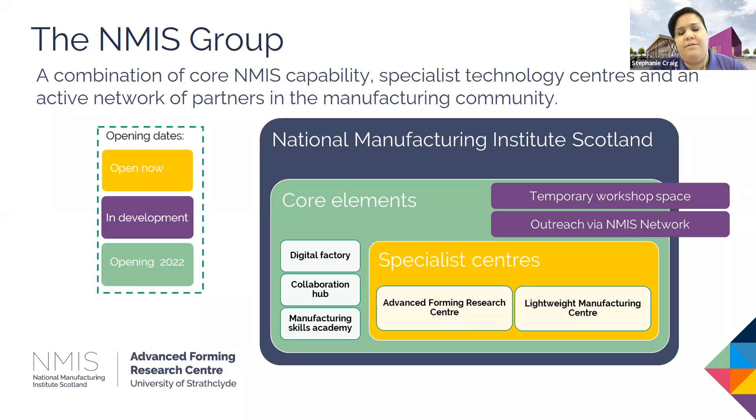So if we jump to the next slide, I will briefly explain the benefits, just a flavor of the benefits of modeling for the industry. First of all, the most important benefit is that modeling is going to explain the kinematics of the sheet metal forming process. SPF, hydroforming, all these forming processes are not easy to be understood.

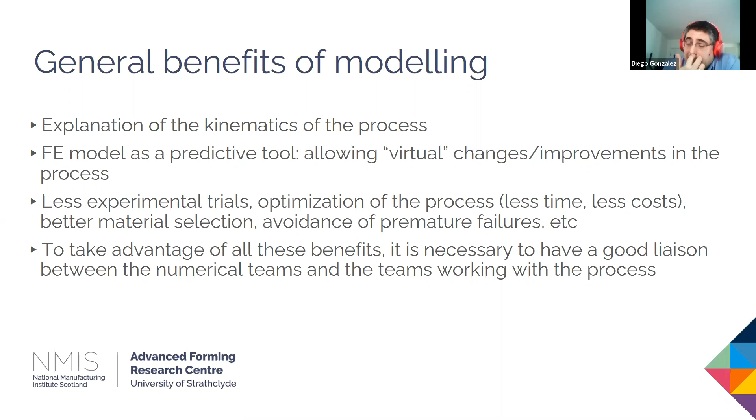In the next slide I will briefly explain the general capabilities we have in terms of modeling in the forming team. We work with two types of software. We have commercial software, and bespoke software focused on sheet metal forming applications like PAM-STAMP, for example. We also have general purpose software like Abaqus.

We have expertise in the implementation of Fortran subroutines, user element subroutines, or user material subroutines. On many occasions the commercial software needs to be complemented because you cannot find in the libraries the type of user element or material you need. So we have expertise in this type of Fortran subroutines, and we also have expertise in MATLAB and Python scripting.

In the image of the slide, we have a general workflow of a simulation of a sheet metal forming process. We can start with a MATLAB script, for example, in order to obtain the values of the parameters of the model. We can then jump into the FE analysis. We can have the commercial solver dealing with the equations of the problem.

And we can at the same time have coupled with the FE solver a user subroutine to define the material, for example. And then we can post-process the results by means of a Python script.

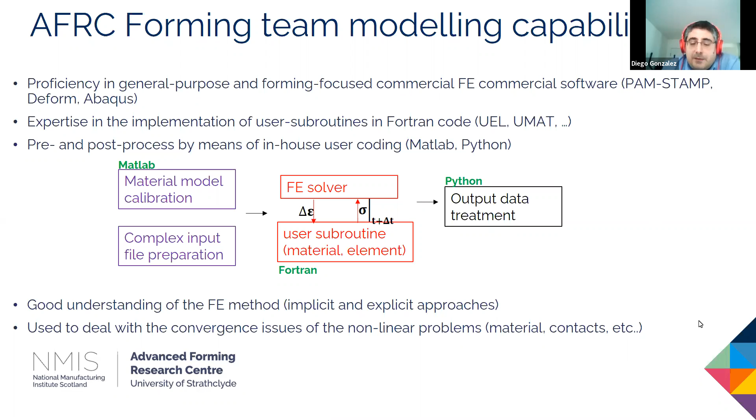If we jump to the next slide, we will explain briefly a bit of process modeling. In order to take advantage of the benefits I mentioned before - the kinematics, the understanding of the kinematics of the problem, the optimization of an industrial process - we need to have a reliable model. This means we need to consider all the relevant aspects and variables of the hot or cold forming process, whether it's SPF, superplastic forming, creep forming, deep drawing, or hydroforming.

We always need to consider the friction, the exact value of the friction of the process, the initial blank shape, and the material, which needs to be defined and characterized very precisely and accurately. All these relevant aspects need to be considered in the problem.

In the images of this slide, we have two examples of SPF simulation. On many occasions, the client asks the forming team to come up with an optimization of the SPF process, and we find the optimum pressure cycle in order to have optimum SPF conditions within the titanium material or the material of the SPF process.

Or in other cases, the client comes to the facility asking for a temperature reduction, with all the benefits linked to this reduction - less alpha case formation, cheaper tooling - and we need to find the pressure cycle to proceed with this reduction in temperature.

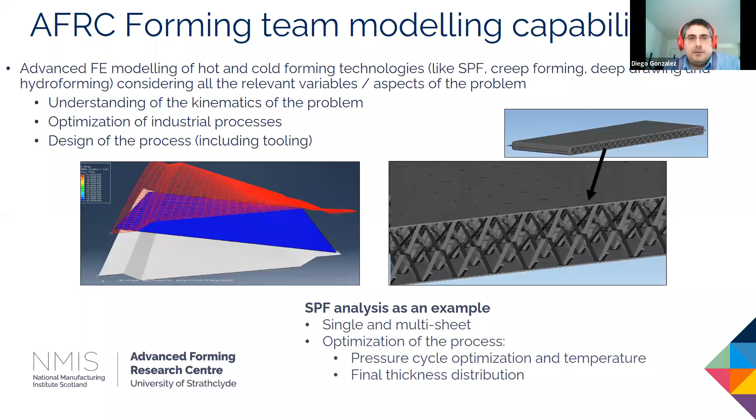The next slide will explain a little bit about the testing capabilities we have in the AFRC. Obviously, the type of tests we do are linked to, or are based on, the analysis needs.

If we work with cold technologies, we proceed with tensile testing, for example, to define the flow curves, the R values, the anisotropic values. This is also available for warm conditions. If we work with SPF or hot forming processes, we proceed with tensile testing at high temperature in order to capture the rate dependence of the material on temperature.

In terms of failure, we need to know the limits of the formability of the material. We have the bulge testing based on Nakajima test samples, and coupled with this test we have GOM equipment and a digital image correlation approach.

When we need to validate the material, the simulation, and the model, we can proceed with GOM scanning of the components and compare the thickness of the formed component against the results of the FE simulation, or we can compare the shape of the formed component with the FE results.

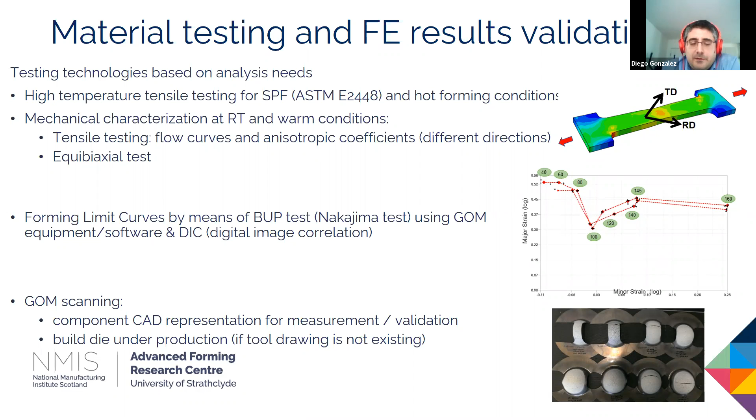In the next slide, we will briefly explain a bit of the material modeling. Obviously, material models are critical to have accurate and reliable simulations. We work with advanced plasticity models, rate dependent and rate independent models, and we have experience with anisotropic models.

We work with kinematic hardening models like Yoshida-Uemori to capture, for example, the spring back phenomenon. PAMSTAMP has this Yoshida-Uemori model built into their software, and it is really useful to precisely capture the spring back phenomenon. We also have expertise in microstructural-based modeling.

Hosan will talk about this later on. Here is just an example where we apply microstructural-based modeling to understand how the grain size evolves during an SPF process.

Calibration of these plasticity models is really important, and we do it through MATLAB scripting or by means of the math wizard in PAMSTAMP, for example.

We need accurate estimations of the model parameters. When we talk about damage prediction, we also have expertise in this type of model, which evolves a damage variable for each individual element of the simulation to determine when we are going to have fracture.

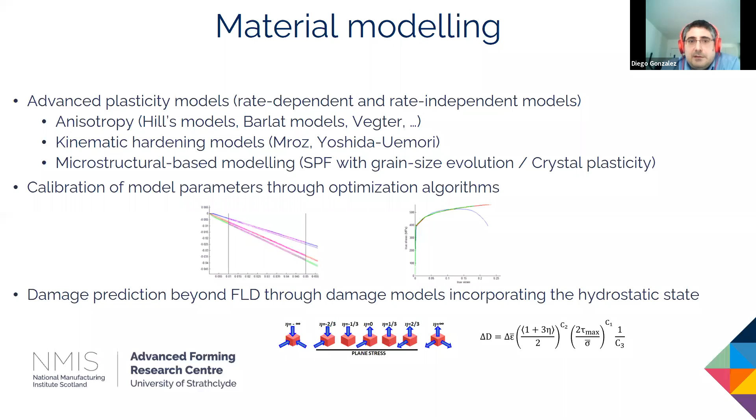In the last slide related to material modeling, I will briefly explain how we proceed with the anisotropic characterization. In cold forming simulation, we need to precisely capture the anisotropy of the material. In many occasions we have to deal with titaniums or aluminums, or materials which have a lot of anisotropy.

We have a very good understanding of anisotropic models - the Hill family of models, the Barlat family of models, Vegter, and other anisotropic plasticity models. To correctly define which type of plasticity model we need to apply for a specific material, we need to consider all the information available, all the information coming from the lab.

We consider the yield stresses at different directions within the blank. We consider the equibiaxial yield stress, which is very important because we want to capture and understand how the material behaves in an equibiaxial mode. When we form a component, we mainly have plane strain and biaxial deformation modes, more than pure tensile modes, and we also use the R values, the anisotropic coefficients, which allow us to understand what type of anisotropic model we should be applying.

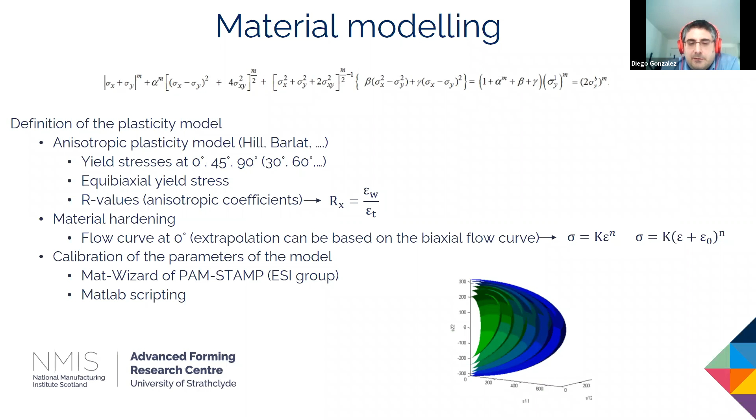We will jump now into the 4 case studies. So Hosam will explain right now the simulation of superplastic forming processes.

Thank you, Diego. Hello, everyone. Today I will take you through 2 case studies from our work in modeling of different processes. The first one will be about the modeling of the superplastic forming process.

Modeling the SPF process is required for many goals. One of those goals is, for example, the development of the pressure curve, as Diego mentioned, required to set the press to form the component.

The whole steps from developing this curve, starting from the moment the die arrives till we have the curve, was described in a previous webinar titled Superplastic Forming Benefit and Challenges in our NMIS Inside webinar series. Hopefully you have attended this webinar. If not, you have a chance to view it again through our YouTube channel.

One key step in the development of the curve is the finite element analysis and modeling the SPF process. To have an accurate FE result, the material should be well characterized to get the material parameters that will feed the material model used in the analysis.

As Diego mentioned, in the AFRC we have those materials testing and characterization capabilities to get those material parameters. We do high temperature tensile tests on our Zwick testing equipment. Tests can be done in argon environment and up to 1200 degrees Celsius.

We need the material properties from two types of tests, the step jump test and the normal hot tensile test, to have the flow curves at different controlled true strain rates at required temperature. As a result of the various tests we completed for different alloys, we have good expertise in testing different materials. Then once we characterize the material and based on the test result, we can define the optimal SPF conditions.

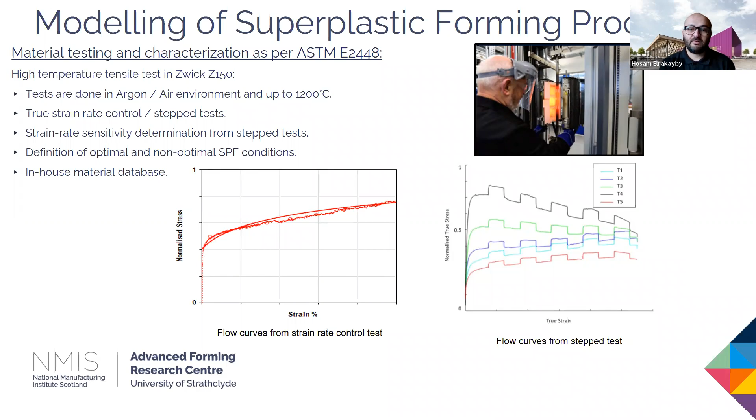As you see in the top right of the slides, there are phenomenological and microstructure rate-dependent material models that are well known and available in the public domain that we use beside other models to represent the material behavior. For example, the last constitutive equation captures the grain growth or the grain size evolution during the SPF process.

This equation captures both the static grain growth by atomic diffusion due to the high temperature in the absence of deformation condition, and the other part of the equation captures dynamic grain growth, which is related to the material deformation. While the mechanical behavior itself is modeled by the viscoplastic response of the material, which is expressed by a power law-based model, for example, as in the first equation.

Then two steps are usually carried out to calibrate the material model and to model the material response during SPF. Firstly, the microstructural evolution is numerically analyzed by calculating the parameters of the last equation, for example rho, phi, mu1, mu2. The fitting of the experimental data for the grain size is based on in-house developed MATLAB script.

Secondly, the flow curves are fitted by using the grain size evolution data as an input to the constitutive equation at the top. Once the model is calibrated, it is then implemented into the FE package through subroutines.

As a result, from the analysis, we can get the pressure curve, visualize the material deformability, thickness distribution over the forming component, thinning, and etc. That helps us to predict how the final component will look like and saves a lot of trial costs that would have been spent if we tried to form the material without modeling to understand its formability.

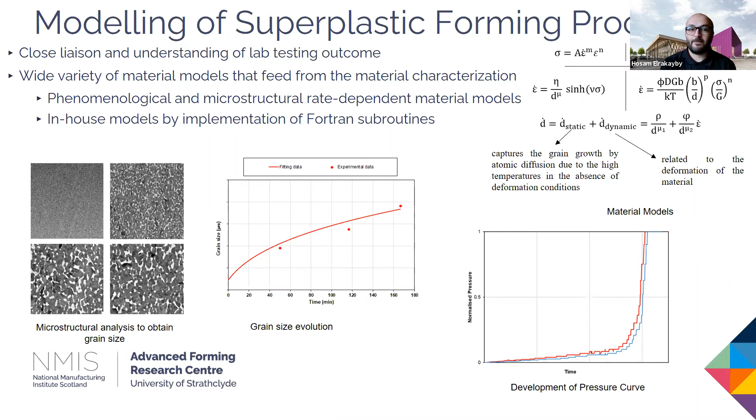So we have here Ti54M titanium alloy, developed by our tier 1 member, Timet. This alloy has almost the same mechanical properties as the well-known Ti64, but it can be deformed at lower temperatures. Therefore, there is a potential for Ti54M to replace Ti64 in an SPF application.

You can see in the figures the thickness distribution of a component after being formed. On the right side is the GOM scanning result of the formed component, while on the left side is the finite element calculation. There's a good agreement between the FE result and the GOM result. This is one outcome we have from the analysis.

We can also check the formability of the material at different stages during the process, and we can check the grain size of the component, etc. So, as I mentioned before, there's no need to spend money on trials to get results - through modeling, we can predict those results and save a lot of money.

That was all about the modeling of the superplastic forming process. And for now, I will pass it on to Elangovan.

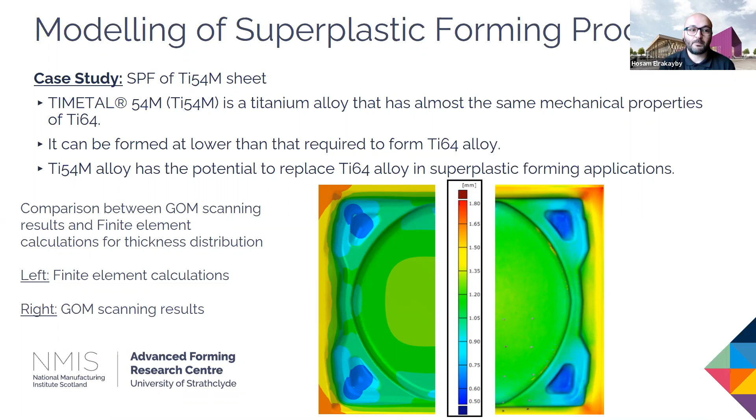Thanks, Hosam. Hello, everyone. I'm going to talk about cold sheet forming process in the next few slides. The case study is about the punch hydroforming of nickel superalloy. For the benefit of the audience, I just want to give a brief introduction about the process.

So what do you mean by hydroforming process? The hydroforming process is a specialized forming technique that uses fluid pressure, for example water or oil, to deform the sheet or tubular material to form a required shape.

Excuse me, yeah, sorry about that.

So the typical hydroforming techniques the industry uses for sheet forming would be the cavity type hydroforming process and then the punch based hydroforming process. Today I'm going to talk more about punch hydroforming.

So the typical materials the hydroforming process utilizes right now - we could form steel material, aluminum, commercial pure titanium, and nickel superalloys. These are the typical materials which we could use the hydroforming technology to form.

And the aerospace industries use this technology to form very complex geometry. However, there is very limited use of this particular process in the automotive industry, so they could take advantage of the benefits coming out of the hydroforming technique.

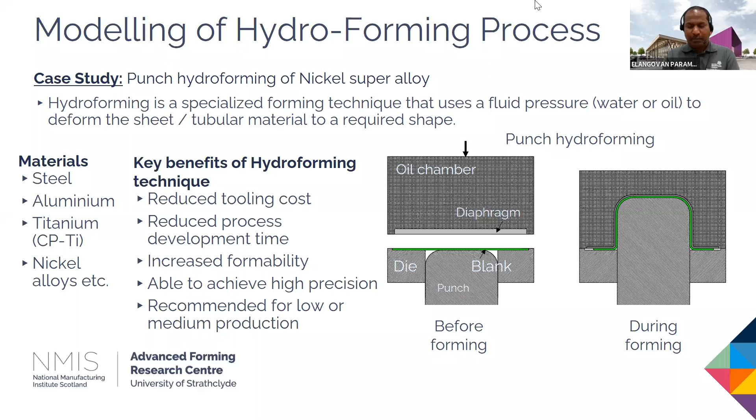And before we go for process modeling, we will try to analyze the material, as discussed in the previous section by Diego. So we do a lot of material characterization for the benefit of accurately predicting the result. We do tensile testing mainly to characterize the work hardening behavior of the material, and the anisotropic behavior of the material. And then we use the bulge test, mainly to capture the biaxial yield point, which is very critical to develop a material model.

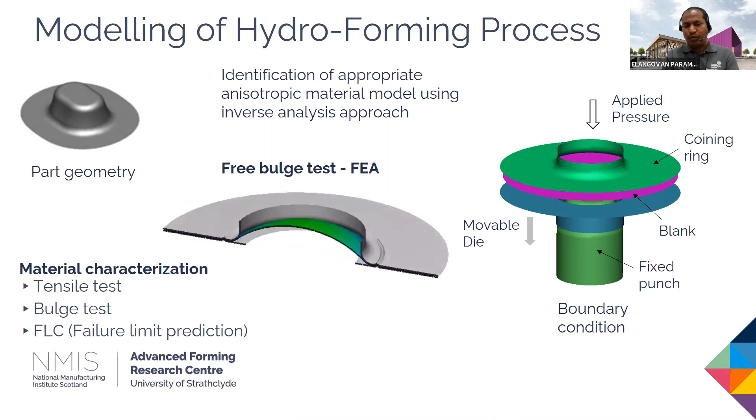For the benefit of our customer, we used to do a lot of iterations through design of experiment by considering the key process variables, for example the pressure, the blank geometry, tooling, draw depth. These are the process parameters we consider for our design variable.

For example, just for understanding purpose, when we increase the pressure during the forming process, especially the hydroforming one, we stretch the material too much. Due to that we may end up with rupture or even localized thinning. So we have to identify and optimize the pressure value - this is quite important.

And in terms of defining the depth, defining a depth is also an important parameter. If you want to achieve a certain level of thickness in the final formed part, the definition of such depth in each process step is quite important.

And then depending upon the complexity of the part geometry, we need to define the number of process steps. And then sometimes it may require heat treatment as well. These are the typical process parameters we consider by doing a series of experiments.

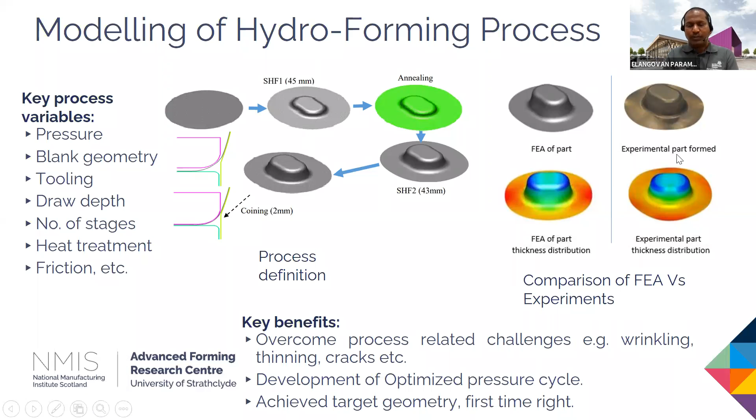And finally, by doing this modeling development, we could achieve the target geometry first time, right? So with that I will move on to my colleague Hosam - he will talk about thermal analysis further.

Thank you, Elangovan. Now I'll talk to you about another modeling capability we have in our team and currently have various projects on - it is the thermal analysis of forming and forging systems. The main aim of this type of analysis is to help us identify the temperature over the system we are studying, whether it is tooling or the system itself.

Also, we look for other outcomes such as the thermal expansion, thermal stresses distribution in the system. All those outcomes are very critical for designing the tooling or the system itself. It allows us to choose the right materials that can withstand the predicted temperature.

In the thermal analysis of tooling, we consider the different types of heat transfer from convection to conduction to radiation. These types of heat transfer are reflected in the model by using different types of interactions and interaction properties, such as surface to surface contact, defining the gap conductance using film radiation, surface radiation, or even cavity radiations.

In the next slide, I will take you through a case study where we use thermal analysis to help us design the tooling for our Future Forge program.

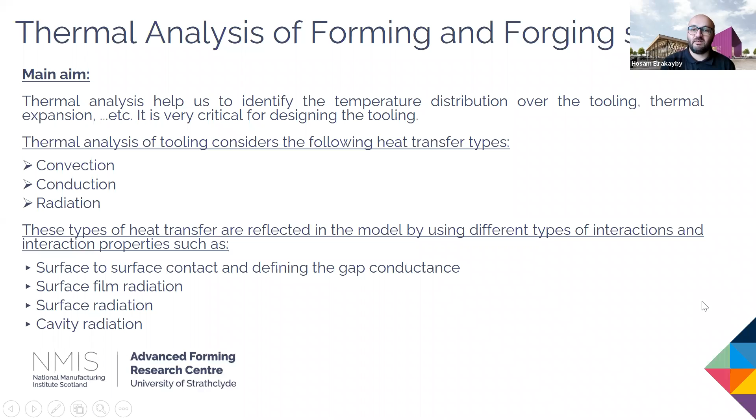The Future Forge program in NMIS will be the world's most advanced hot forging research platform, and will include a 2,000-ton hydraulic press. It's a tri-mode press which enables open die, closed die, and isothermal forging processes, all on one press platform at industrial scale. As part of the NMIS Insight webinar series, there was a webinar titled 'Future Forge: Shaping the Future of Hot Forging,' available on our YouTube channel. If you would like to know more about the NMIS Future Forge program, I recommend you watch it.

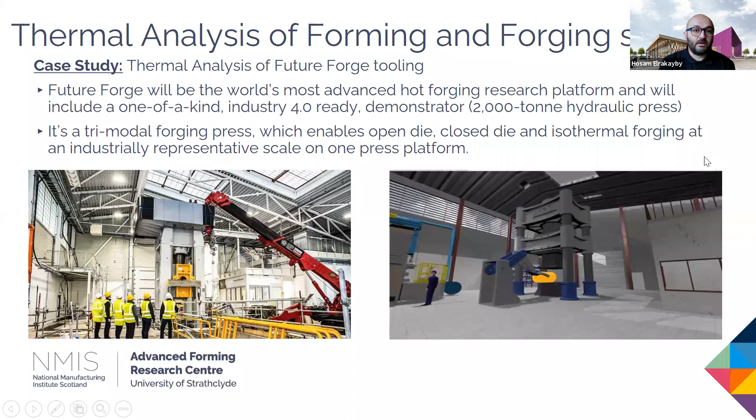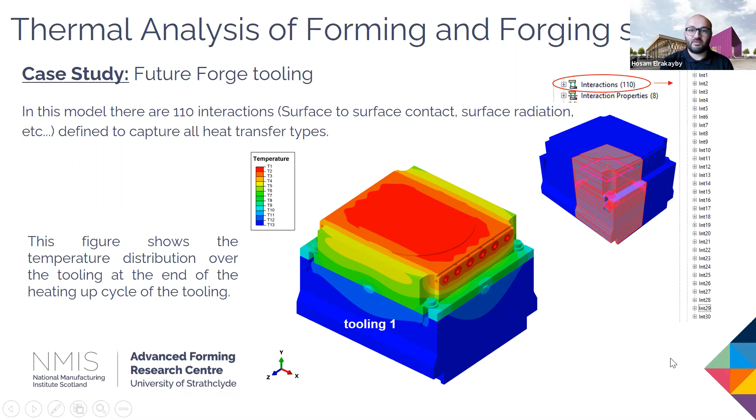That was me today, covering both case studies of modeling the SPF process and thermal analysis of systems. I hope I was able to give you a brief introduction to some of the modeling work we are doing in the forming team. For now, I'll pass it back to Elangovan.

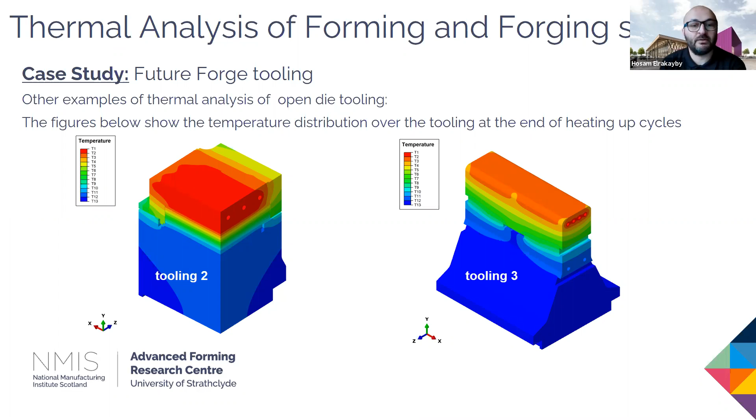Thanks, Hosam. So this is yet another case study we'd like to share. This was recently developed for our new customer—the Carruthers Waterwheel. The key objective of this project is to understand the interaction of the wheel, and then calculate its power and efficiency. That's the main objective of the work.

Following the development of a 2D CFD model, we want to validate the results using a 1:10 scale model, and gain more understanding of the wheel's hydraulic behavior while investigating its performance. This is the overall objective of this work.

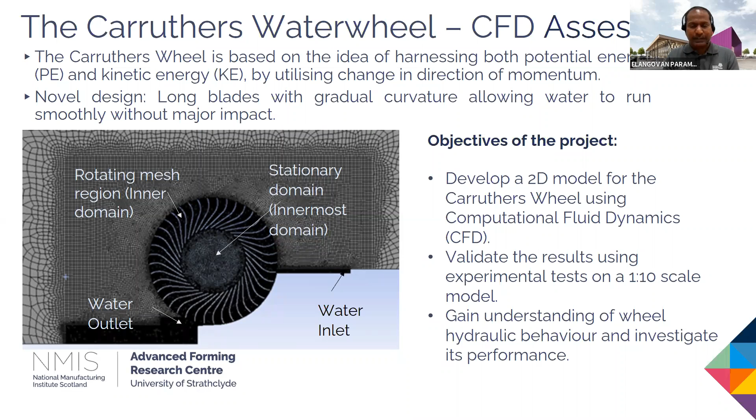So this is the overall definition of the boundary conditions we considered for the wheel. I will share the results in the next slide.

The key benefit we achieved from this project was, as we know, the cost involved for water wheel development and testing in a harsh environment is quite challenging. So we were able to simulate, and correlate some of the experimental conditions.

For example, we simulated two different flow rate conditions, which correlated well, and the fluid behavior matched the experimental work. We could also see the kinetic energy observed in the torque curve, and the model was used to estimate the performance curve of the wheel, proving consistent efficiency of the process parameters.

Finally, taking the learnings from the CFD model, we were able to work on modifying design variables like wheel diameter and the number of blades. This gives good confidence for our customer to develop a different range of wheel designs. With that, I'm going to complete my talk mainly on the case study.

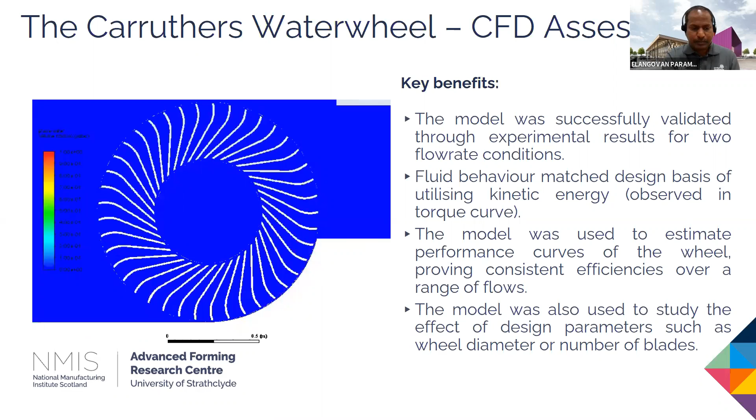Thank you very much to all the speakers today. Unfortunately, I need to read this word for word because they are testimonials. We thought it would be really good for you to hear from the industrial clients we've worked with. All of these clients have completed a body of work with us, with our team, using the modelling and simulation software.

A Boeing representative said that the simulation work provided by the AFRC forming team added value to the project in hot forming. The insight coming from the FE analysis helped in reducing the experimental trials, but also brought significant risk mitigation for the process to be implemented.

Another customer, Timet, said the philosophy of the work done will be used for development of SPF projects in the future. And Collins Aerospace said AFRC has used its knowledge and expertise to provide deformation modelling services to Collins Aerostructures. These services provided useful data in several of Collins Aerostructures' development efforts.

And lastly, from the previous case study, the Carruthers Renewables Company said working with the AFRC has exceeded their expectations. We are very pleased and excited by the results the CFD model has yielded, which gives us greater confidence to invest in a technology demonstrator on a larger scale. A big thank you to Team AFRC.